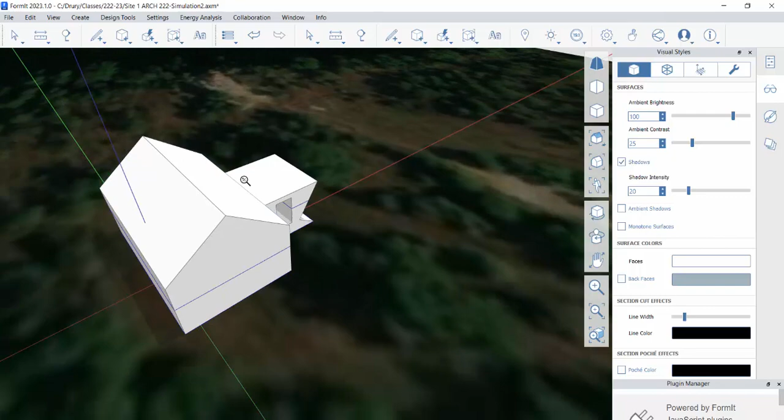Okay, so this video is a short take on 3D printing. We're 3D printing massing objects out of FormIt. This is, again, very much an introductory kind of thing.

First thing we want to know about 3D printing is we have to make sure our models are watertight. Watertight refers to an object being fully enclosed.

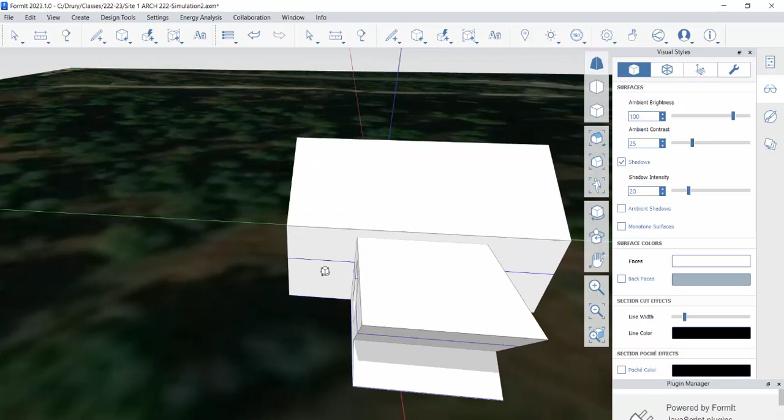In FormIt, I can check water tightness by going to Visual Styles. If I don't have that open, it's right here, Window, Visual Styles. Make sure that's checked. I can go to my wrench and identify watertight issues.

This model is good to go, but let's break it. If I select a face and delete it, this model is no longer watertight.

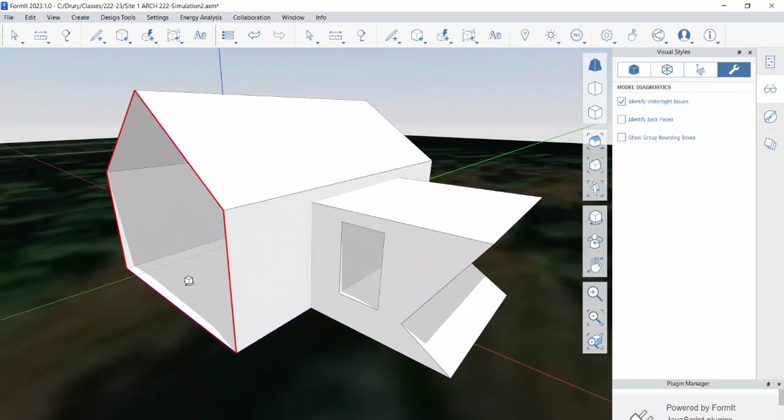This means the slicer, the stage just before sending this to a 3D printer, is going to have trouble identifying what is inside and what is outside. In other words, what's a solid and what's a void.

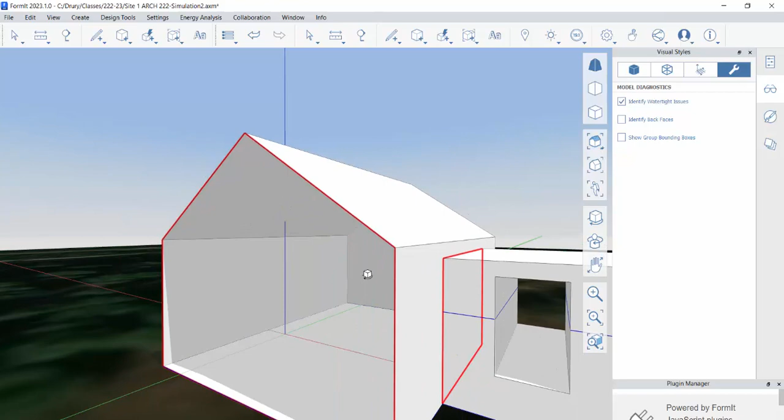It sounds simple on the onset, but it's actually a fairly complicated problem. So let's come into the inside and patch this in as well. I'm going to make that a solid plane. It's really only dividing these two objects.

Just to prove it's not the gaping hole on this end as well, let's go ahead and patch that in back. And I still have a watertight issue right here.

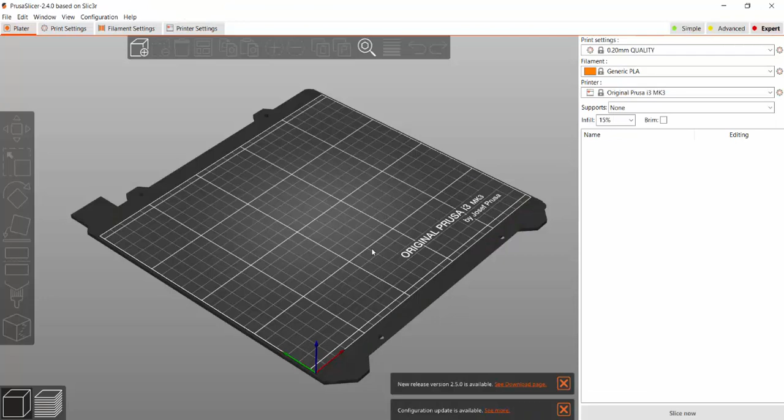Essentially, what's happening is I have coplanar geometry, and a slicer—essentially our print driver, in our university's case it's the Prusa slicer, which is an excellent slicing software.

It looks at a solid object and slices it at whatever interval we say—in this case the default is 0.2 millimeters. Every 0.2 millimeters vertically, it creates a slice so the object can be 3D printed. We'll talk about that a bit more in a second.

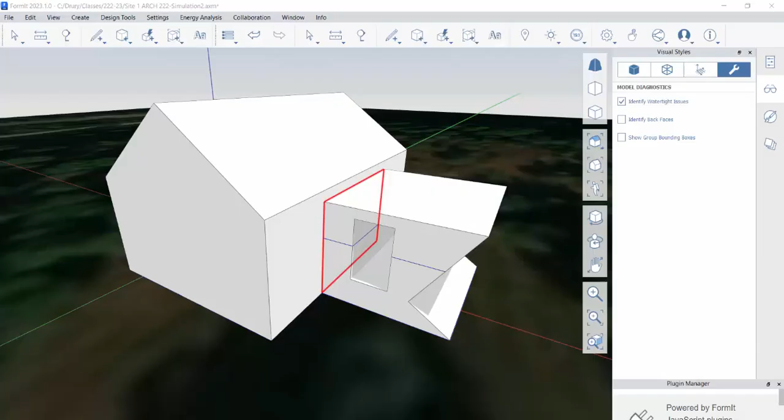But if I have coplanar geometry, something in here, it's going to have trouble sometimes determining: is this a solid or is this a solid? Is this a void or is this a void?

What is inside, what is outside? So watertight issues can be a little bit tricksy.

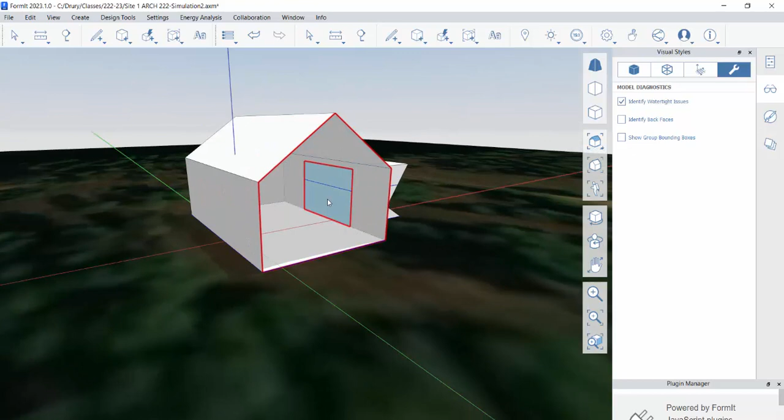Let's delete that coplanar piece of geometry, and put this back together, making sure everything's ready to go with this checkbox, watertight issues. This is solid, it shouldn't have any problems 3D printing.

It's ready to export out of FormIt and into our slicing software. So what I'm going to do is select everything. In FormIt, that's a double click.

Everything's selected. I'm going to go File, Export, Locally. At this point I'm going to use Selected Only—that's what we've had the best luck with out of FormIt.

At times, like in this particular case, I have some terrain built inside of FormIt, and I want to make sure, even though it's not visible, that it doesn't export. So about 90% of the time I go to Selected Only.

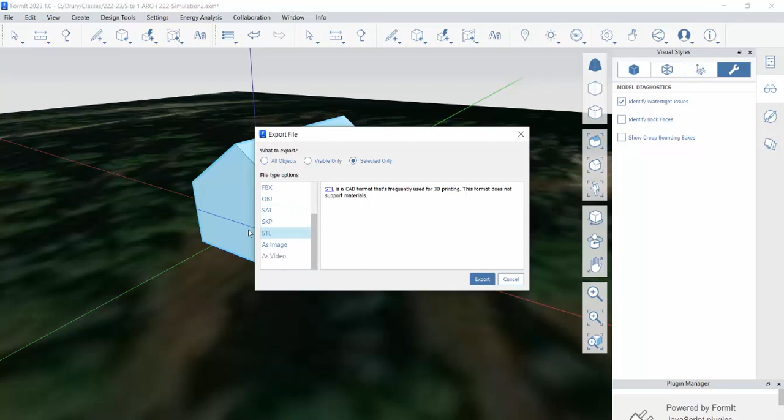My file format of choice for 3D printing is stereolithography, STL, and I'm going to hit export. So this is tiny house mass, and save.

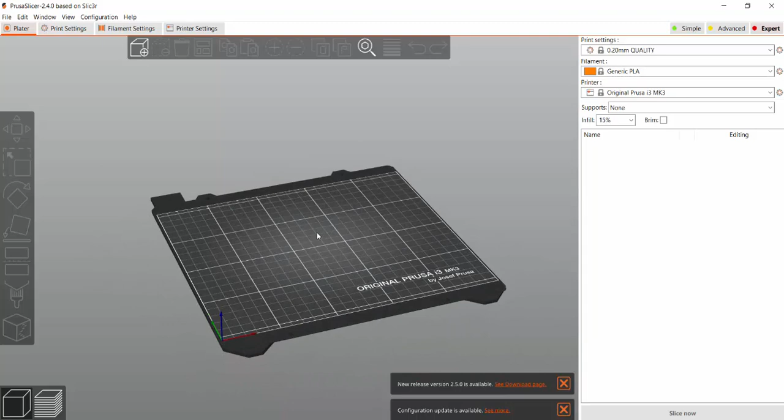Next I'm going to go to my Prusa slicer. We use the MK3, which is the best 3D printer we've ever used by a lot. At our architecture program we absolutely love them, especially when you factor in cost. They're brilliant, couldn't recommend them enough.

So I'm going to go File, Import, STL. I'm going to navigate to my tiny house mass and say Open.

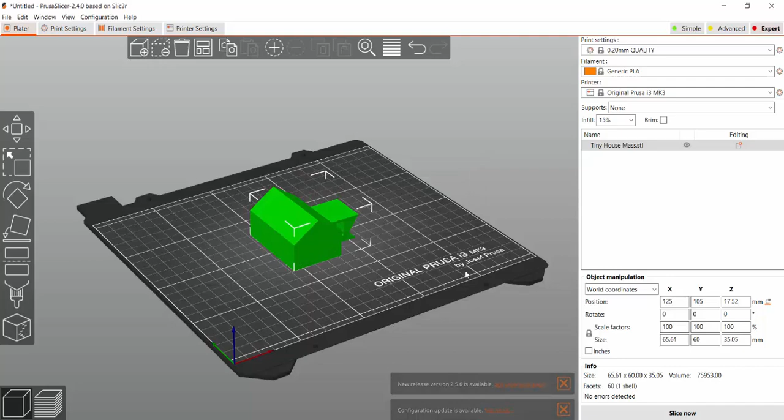Now immediately we're going to run into a problem: if I look at my Y dimension, it's 60 millimeters. If I go back into FormIt and use the measure tool, you'll see the Y direction is 60 feet.

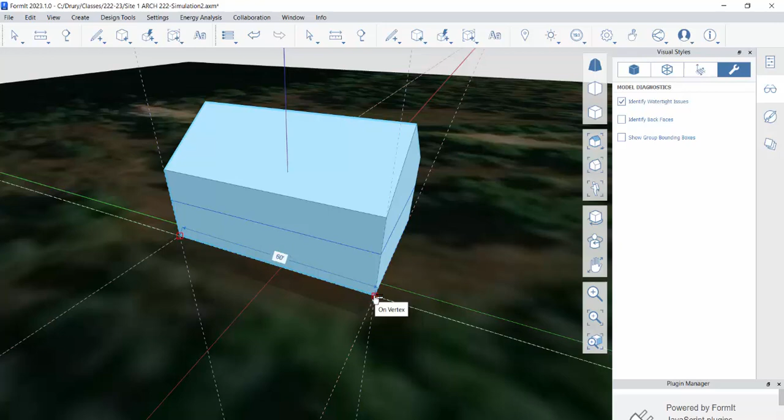This is a constant we deal with going from most architectural software into a slicer. Our base unit in terms of the Cartesian coordinate axis system is often 1 foot; inside something like slicing software, it's going to be 1 millimeter.

So we already have a conversion factor going on with our scale. For architecture, it's not good enough to just print this out—we need this at, say, 1 inch equals 40 feet for a massing model to include in a larger context model.

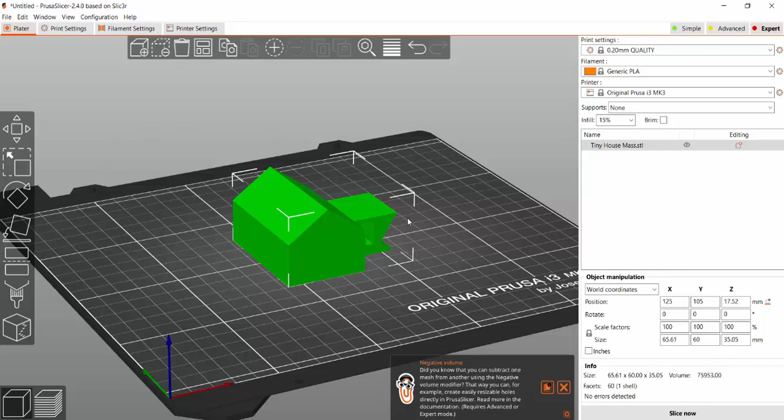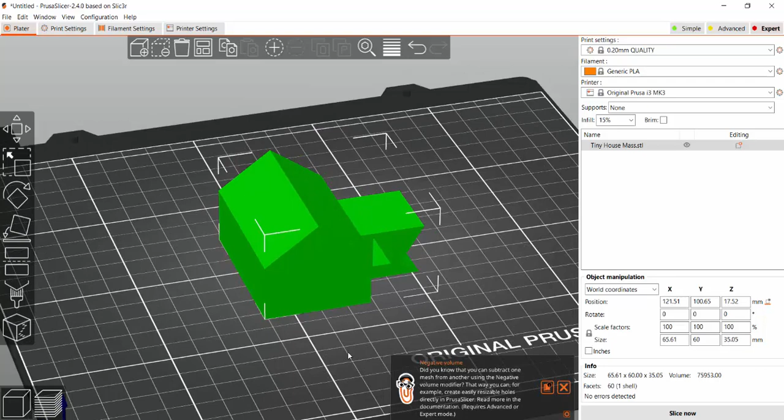3D printing is done with a series of layers. We want to talk about things 3D printers can do and things they'll struggle with. So we've got scale, and then we've got the actual printing process, what can be printed. Even though it feels like magic, it is actually not - there's still physics that happen.

Let's establish a scale. Because it's a bit complicated, we wrote an Excel spreadsheet to help us out. I'm happy to provide the formulas for anybody who needs them, just contact me via YouTube. This formula is: 1 inch equals this cell right here, 16 feet. So this would be for a 16th inch scale model. In other words, 1 inch equals 16 feet.

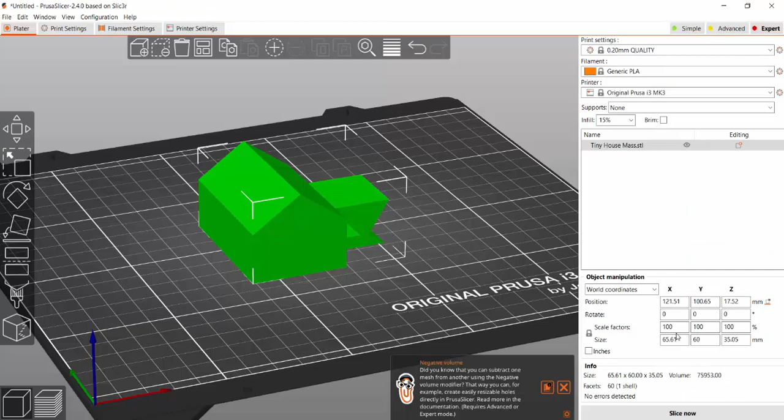I would come to this right here, scale factor for what we started with - Cura, MakerBot, from Revit or FormIt, we could also include in that list, in this case, Prusa. A scale factor, which takes into account changing from feet to millimeters, to get a 1/16 inch scale model would be 158.75%. So if I go into Prusa Slicer, and set my scale factor to 158.75, I have a 16th inch model.

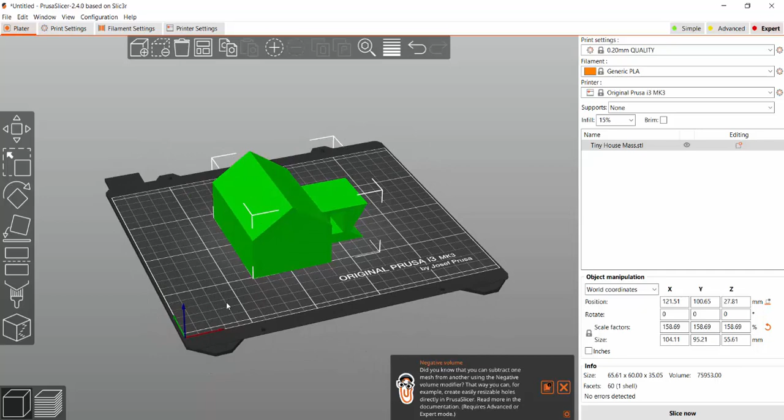Now, this is a massing model, and this is a WYSIWYG - what you see is what you get - base plate from our 3D printer, and that's just a lot of plastic for not a lot of detail. So a 16th inch scale for this kind of thing is kind of ridiculous.

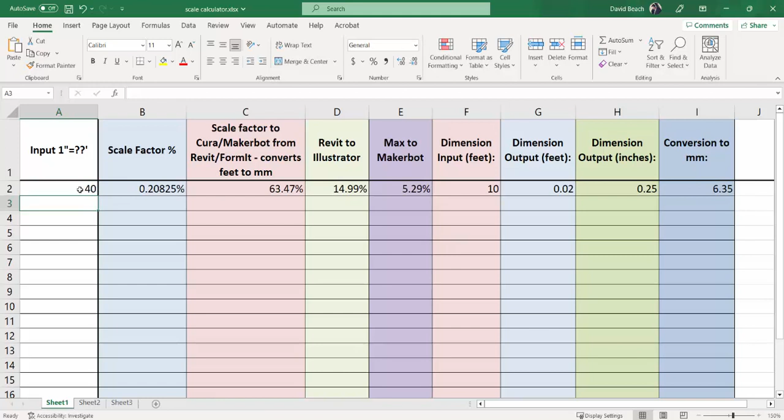So let's change that to a 40th - 1 inch equals 40 feet. My cells will repopulate, and now my scale factor is 63.47. Let's change that down to 63.47. That is a much more reasonable object, slightly bigger than a standard Lego piece. So I'm good with that.

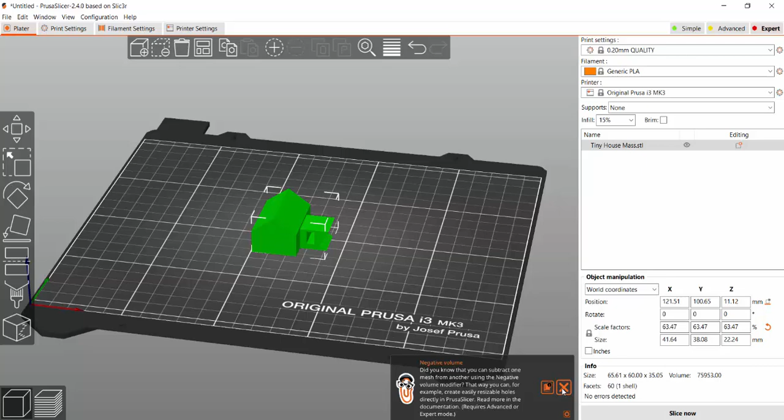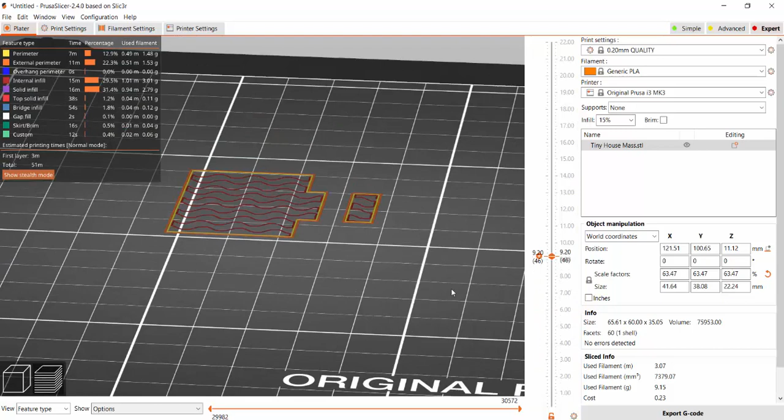So the next thing I'm going to do is run the slice. This is where it takes that object and divides it into layers, because 3D printing is essentially two-dimensional printing over and over again to build up an object. So this is layer 1, layer 2. Let's continue moving on up, and you can start to see both the infill and how everything is working.

It's a little bit weird - oh, I'm extending the base up. There we go. Layer 1, all the way up as this builds.

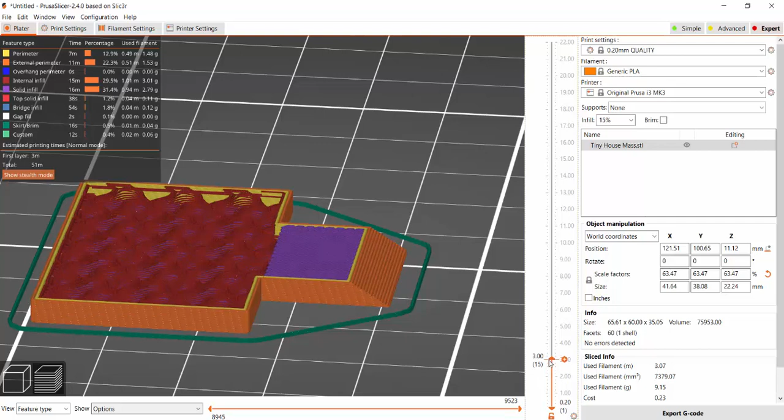So let's talk a little bit about the limitations. Obviously, if we think about stacking, which is what's happening in a 3D printer, an open angle like this - easy peasy, it's going to stack up just like stairs. The higher the resolution, the fewer the stair steps we see, and the more that will look like a smooth angle.

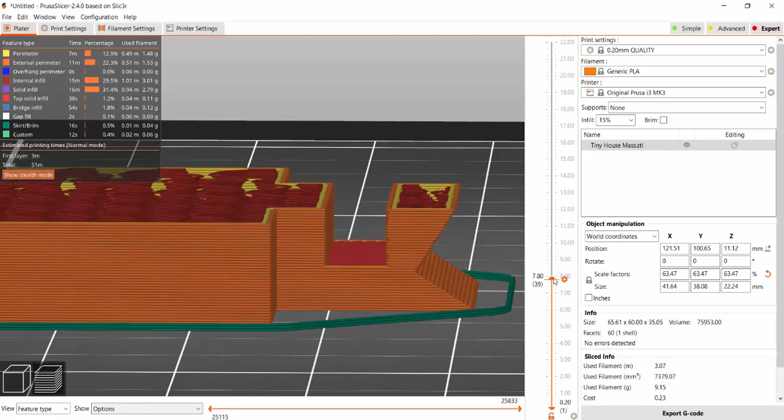3D printing is also perfectly happy to stack going out, all the way up slightly past a 45-degree angle, because essentially it is stacking plastic on top of plastic as it works its way up. And to a certain extent, it will be happy to bridge - I can bridge across this. What it won't do very well is a cantilever. If I had a roof overhang, there would be nothing to catch that edge of plastic. It doesn't like to do that very much.

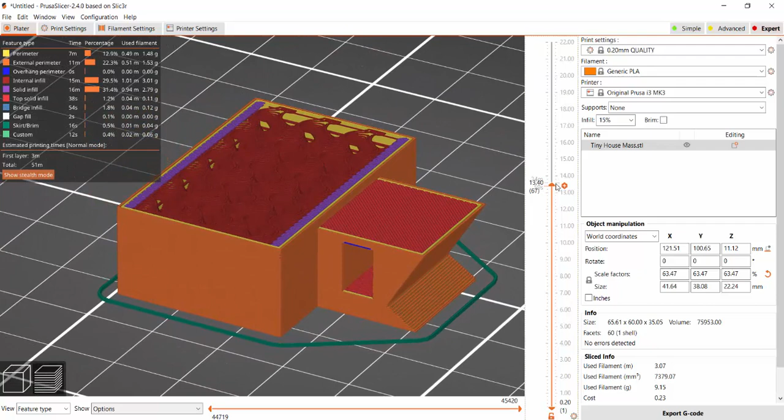So setting up your 3D printing to be successful from the outset is super important. Next, in terms of printing time - see, this is a lot of work for an hour, right? This is a 51-minute print. One of the things taking a lot of time is all of this infill to make this a solid object, and that is because my infill right now is set to 15%.

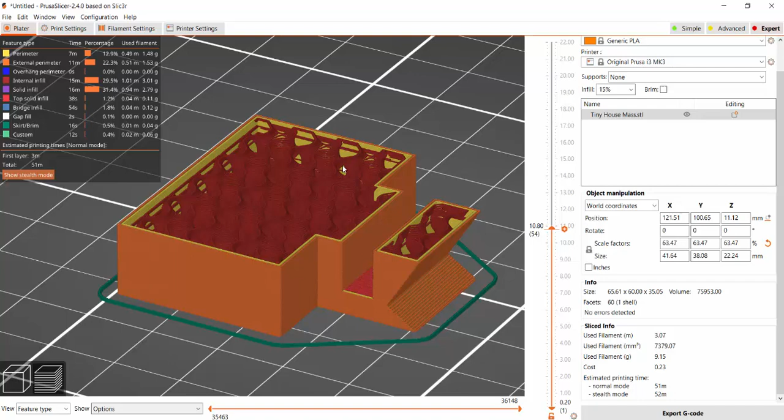I'm not going to put an elephant on top of this or anything - it's not even big enough to do that. I do not need all of that infill. I need a little bit just to keep the structure of the roof intact, but I don't need that much. So let's drop that all the way down to 5%. Rerun the slice, and you can see now I cut about 10 minutes off.

Well, come to think of it, maybe I don't need any infill at all - 0%. Slice that again, and you can see I'm down now to 40 minutes. It's not worth it to me to have no infill at all though.

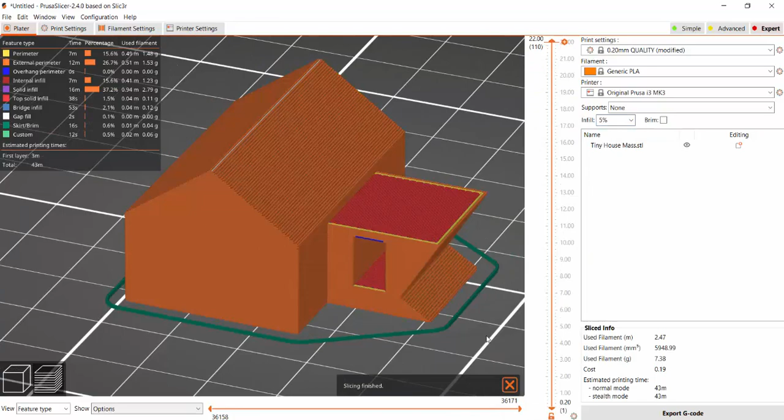So we've got about a 40, 43-minute print for this. Totally acceptable, especially if I think I might have 10 different options and I'm going to print 10 of them. It's certainly going to take more than 43 minutes, but it would take me a lot longer to build all those variations by hand.

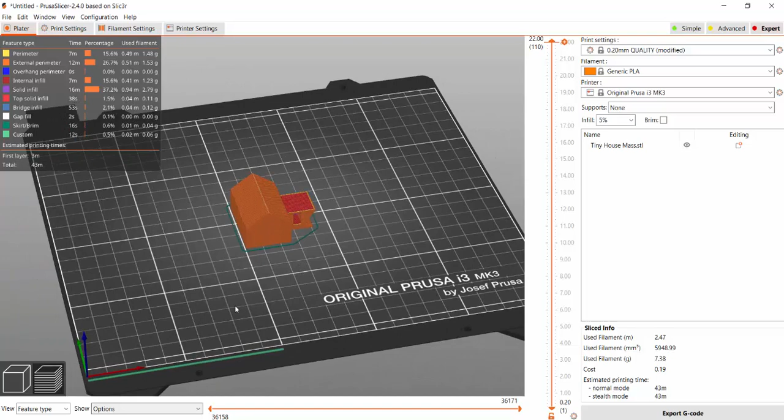So this is a system that we really love as we're starting to build options, as we're starting to build urban models, things like that.

From here, what we need to do next is export the G-code - this is the set of tool instructions for the 3D printer. So I'm going to hit export G-code. It is going to say the file's name, the resolution we're printing, which is 0.2 millimeters, the material, PLA, the printer we're sending it to, MK3, and the time, all in one file. I'm going to hit save.

And now it's down to our actual 3D printer. Typically with those, we're putting that G-code file onto an SD card, the SD card into the 3D printer, and we hit go. Simple as that.